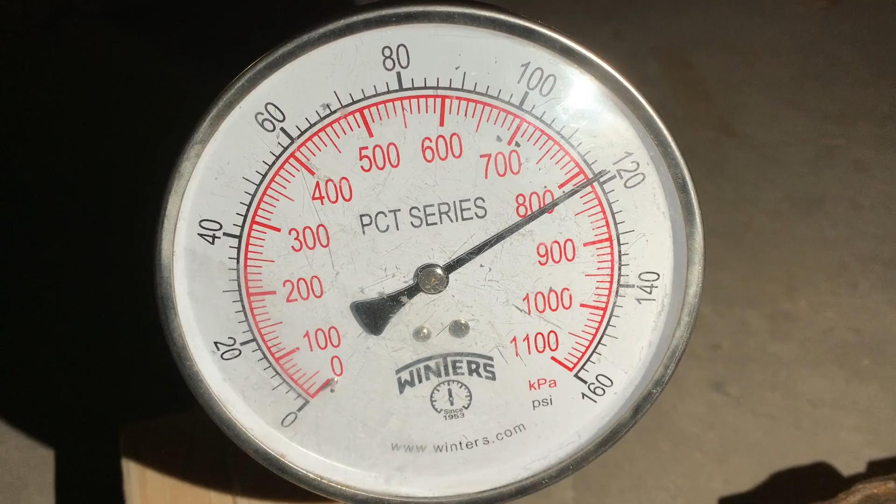We did our pressure test, and there's no light down here, but we did our pressure test, and it's dropped around 2 psi in 2 days. And I think why that happened is because it's starting to get cold out. So the temperature difference makes the pressure go down a bit.

But I'm gonna still go around, check for any leaks, and make sure that there aren't any. Set the pressure back up to 120, leave it for another few days, and go back to it and check. We need to get insulation in this house because cold weather's coming. It's already cold. I'm wearing a jacket already.

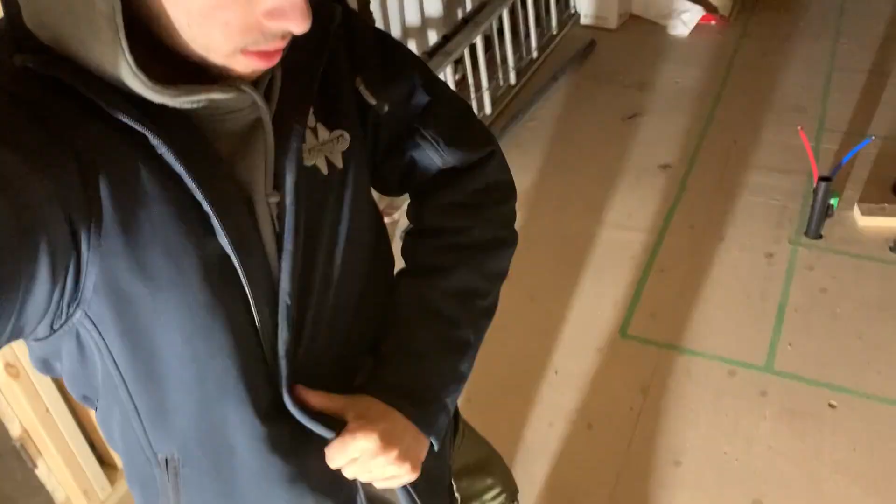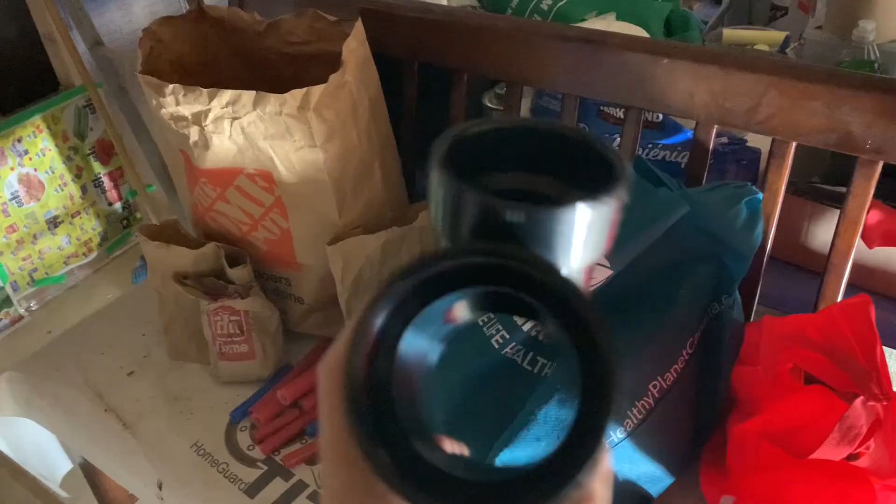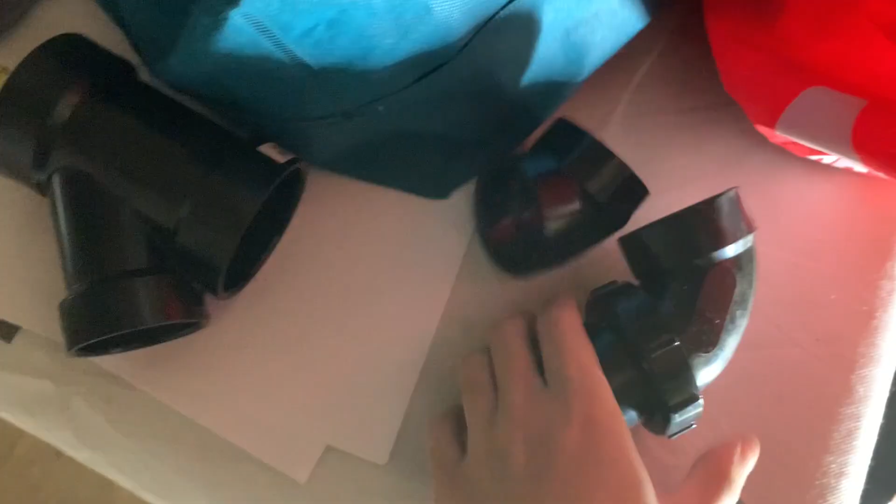So let's get started. So what I'm gonna do up there is I'm just gonna add a 2-inch to 1.5-inch Y that's gonna go this way. So the water slopes down into the drain, which is over there. So it's gonna slope down like this. Then I'm gonna put a 45 like this, put a straight piece, and then put my trap. So it shouldn't be too hard of a task to do.

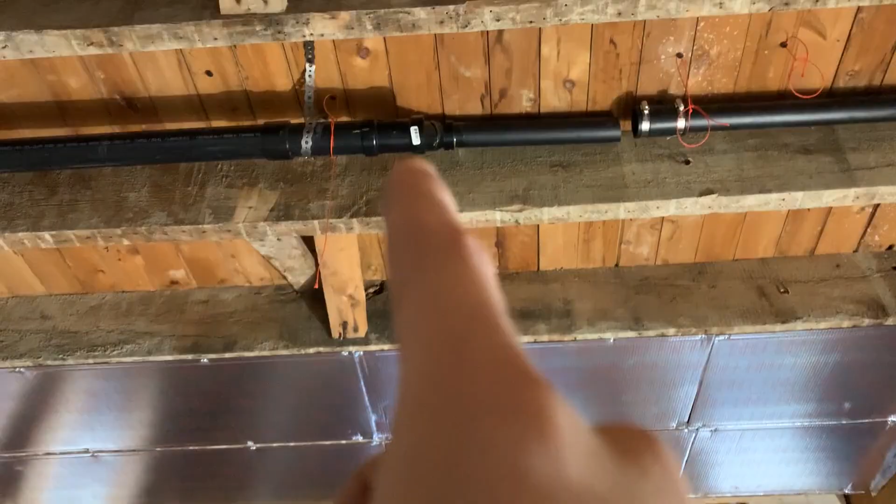Okay, so I got this done. The trap comes down, goes into my 2-inch drain. I'm gonna put a stub out that goes into the hole and into the ensuite. So now that I did that, I'm gonna work on this shower drain. I'm gonna pop it up through there and make my connection for my vent. And then that should be done for all the drains in this house. Then I'm gonna go around, finalize anything for PEX, and the inspection should be ready to go.

Okay, so little situation happened. I had asked a relative of mine if he's able to go and purchase the bathtub that I need to install upstairs. So I sent him a picture of what I needed, and he went to the store, he bought it, he came here, and we were about to bring it upstairs, and then he goes, "You needed a right side drain, right?" I said, "No." He said, "The picture you sent me says right hand side drain." I said, "Oh my God."

So it's the wrong one, and I'm not gonna install the right one today because they don't have the right one in stock. So it was my fault in the first place, but even if I was right, they still wouldn't have had it. So it's nobody's fault. I'm just saying that to make myself feel better. Anyway, so I'm not installing any of that today.

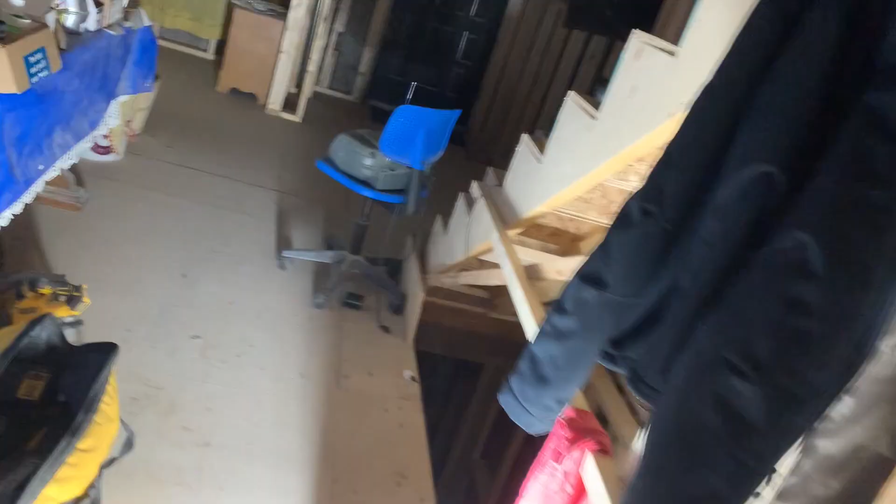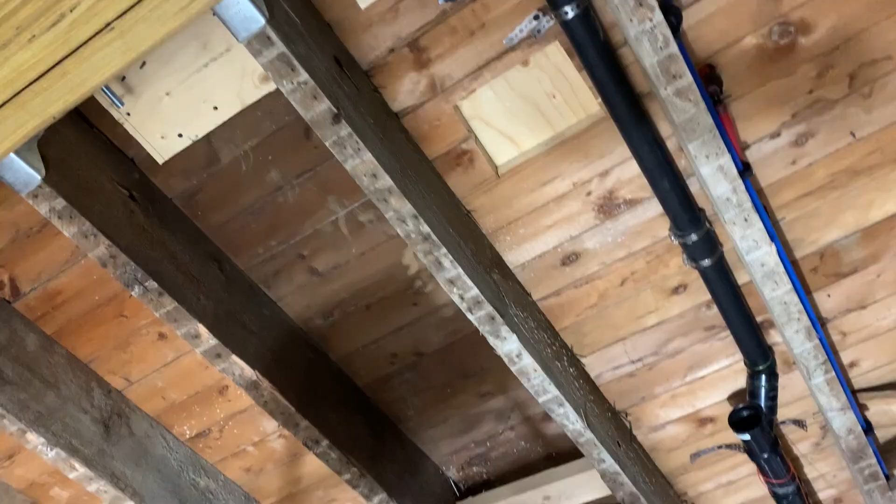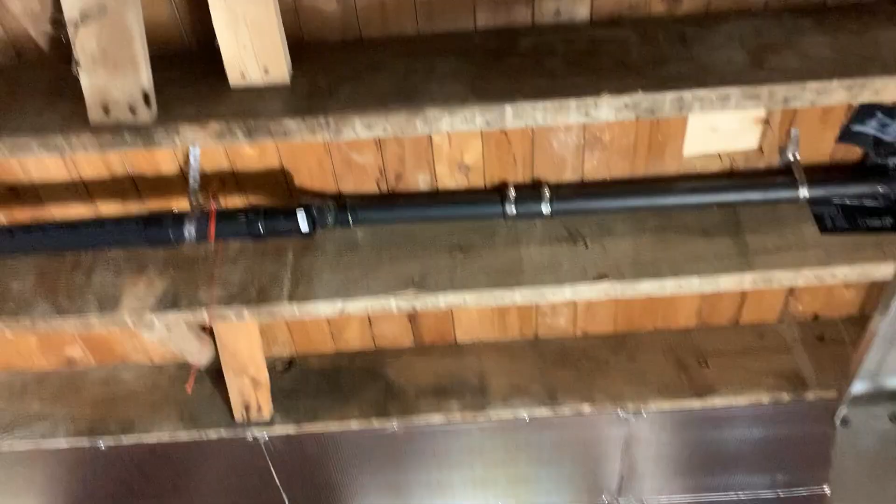But the situation is that I have my overflow drain here, and it has to go up there where I cut out that rectangle, right? Recording is kind of difficult. The problem is that this vent is in the way back here. This one that runs here is in the way of my overflow side. I think what I need to do is buy this bathtub, have it here, and kind of see how much room I have to play with underneath the bathtub on the back side of the bathtub.

So I think today's done. I got this floor drain in. I did my connection to my hose outside. I didn't record that. And tested all my pipes if they're leaking on my PEX lines. And this is the only thing that's stopping us right now from doing our inspection.

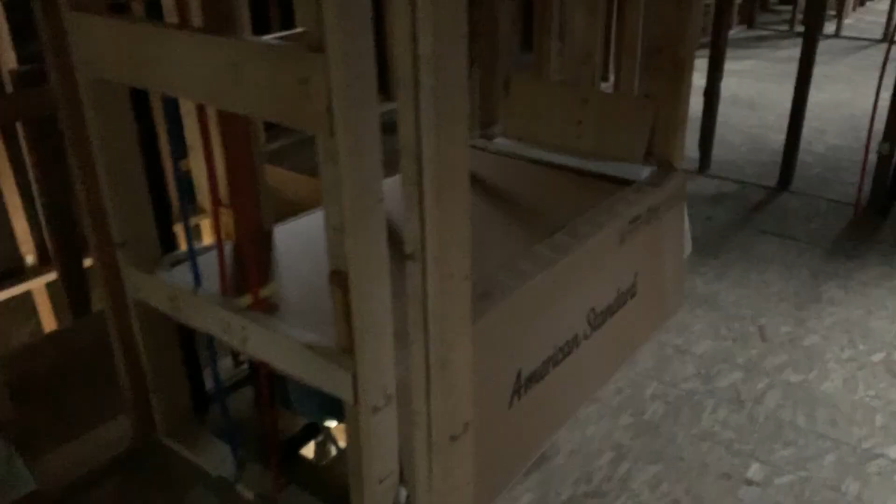Okay, it's another day here on the site. Today, I made a little list of what I'm gonna do. Actually, first I'm gonna show you what we got done on the weekend. I don't really record on the weekends just because I have my dad and my brother helping me out here. So we just kind of try and get things done. But the bathtub is installed in the ensuite. It's all covered up now because we don't want it to get dirty and scuffed up.

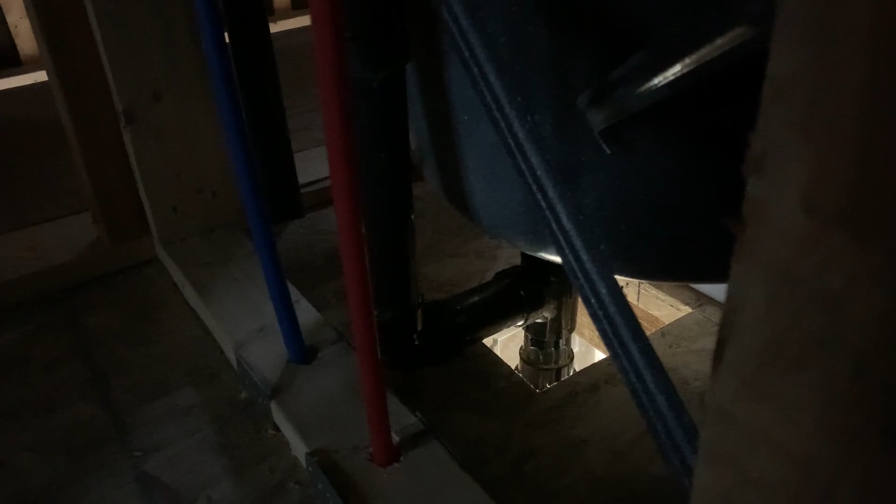But I did my connection down here. We used a direct drain for this shower because I have my vent that's running here. So we needed to kind of deviate somehow. So we used a direct drain, I think it's called. The floor drain of the tub goes directly into the trap and then tees off and goes into the overflow. So that's done. So you can't really see that.

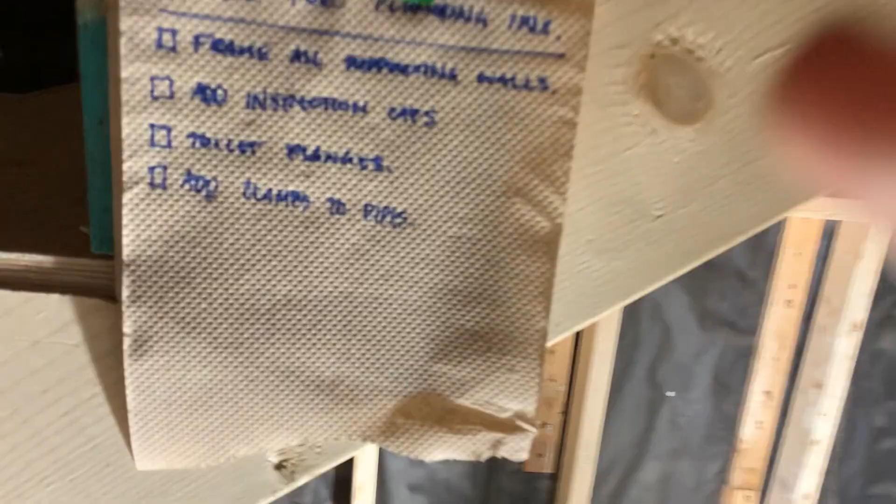Okay. It says frame all supporting walls, meaning everywhere where there's water lines in the basement, because up here everything's fine. Everywhere in the basement where there's water lines that there's no wall to clamp the water lines to, I'm gonna add a piece of wall where it needs to go.

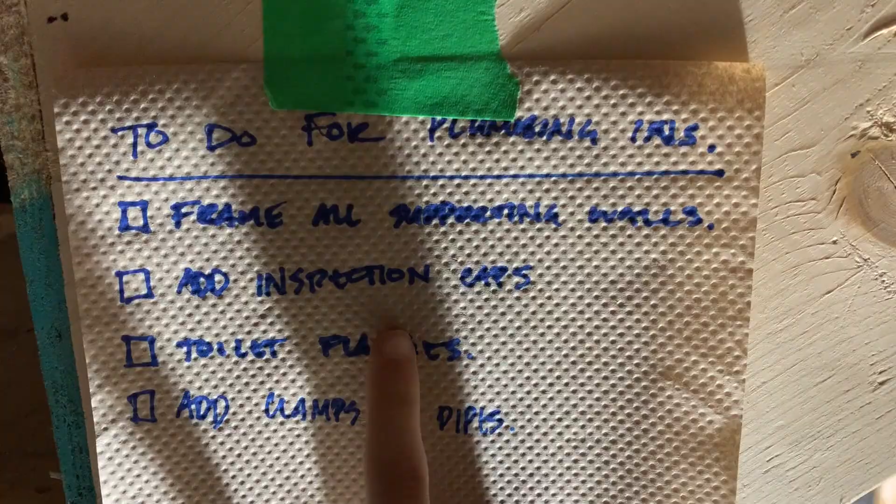Basically, I'll show you downstairs. Add inspection caps. So here in Ontario, you need to fill up your plumbing, your drain lines, with water. So then when the inspector comes, he can kind of knock on the pipes and see if there's water in there. And then you could check if there's leaks.

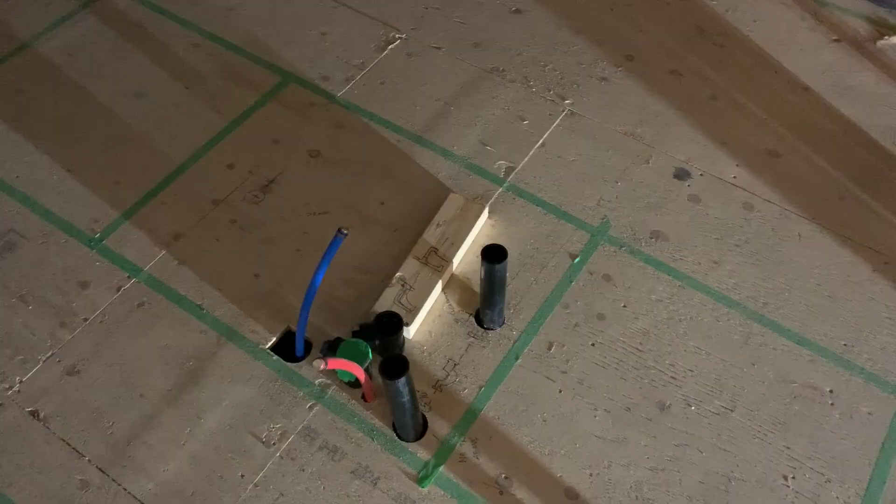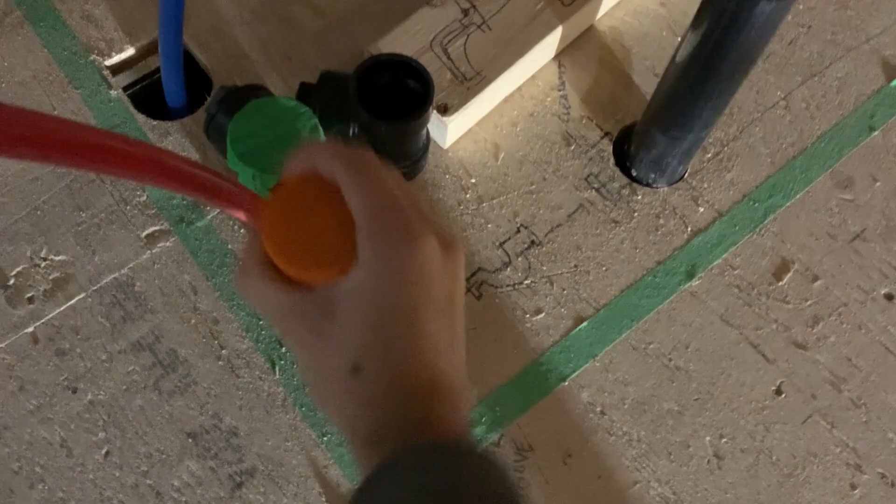So everywhere where you have a stub out, I don't know why it's not focusing. There we go. Everywhere you have a stub out, you're going to put one of these orange caps. And they just go on top, glue them in. And then after your test is done, you could just cut your pipe underneath.

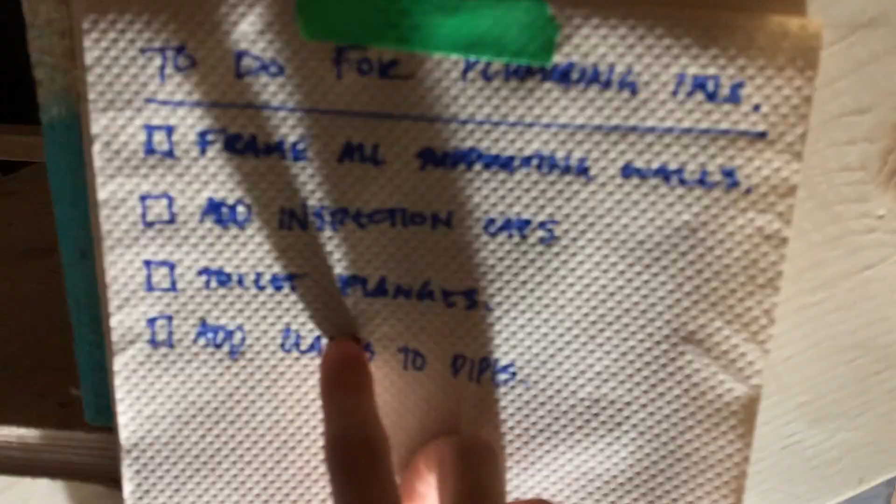Toilet flanges. This is a bit of a problem. So up here, where my toilet flange goes into my floor, it should have been stubbing out far past my subfloor, like these are. But that's not the case. I cut them lower than the subfloor, which is not good, and they're glued already. So I have to figure out what I'm gonna do with those. I'm gonna see my options.

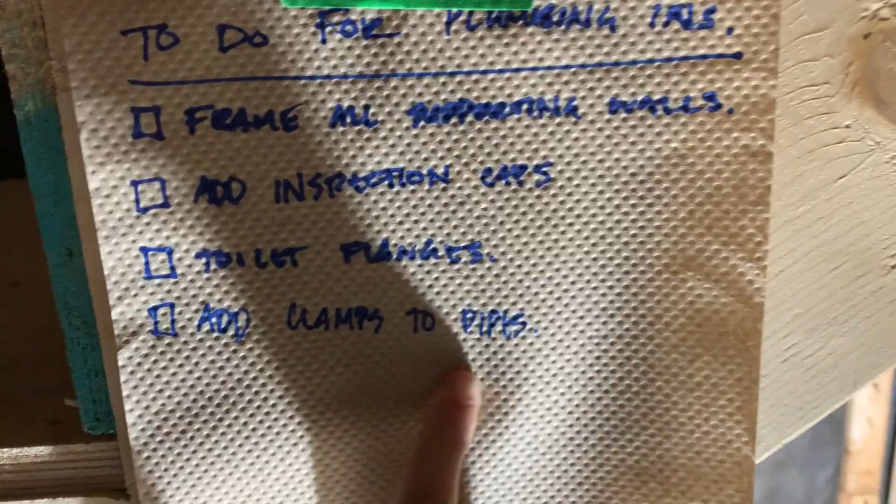And then the last thing is to just add clamps and supports to my drains and my water lines, just anywhere that they need to be added. And then we should be ready for the inspection.

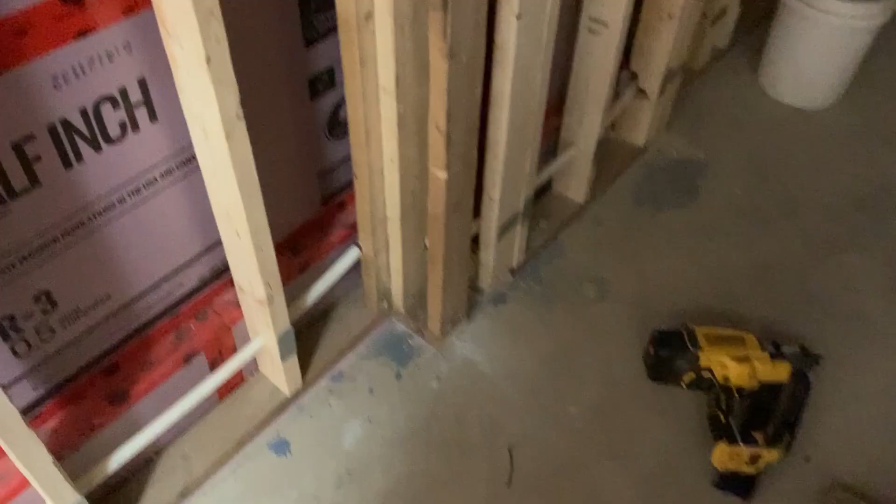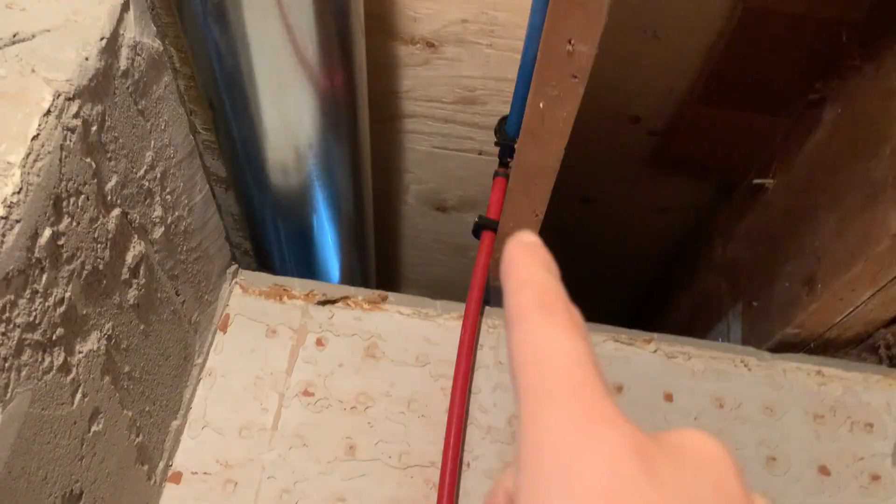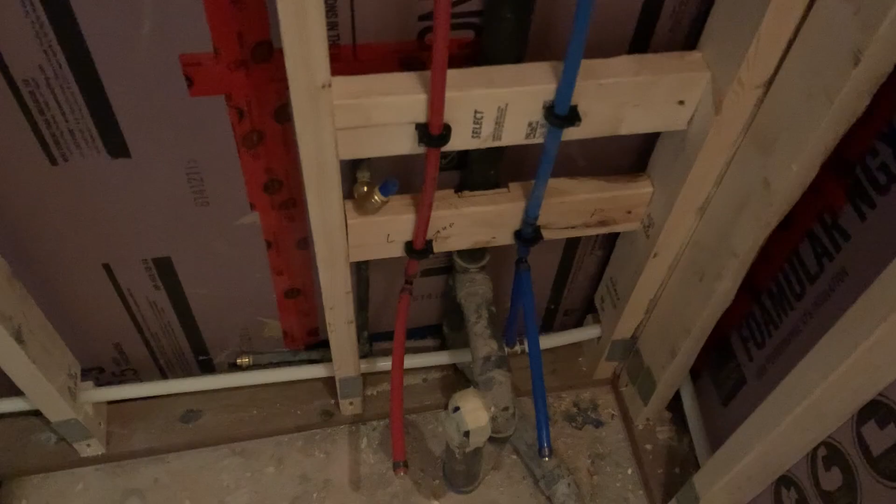Okay, so I got this framed up. It didn't take too long. And now what I'm gonna work on is in this washroom. I know it's a red pipe, but we ran out of blue. But we had to run our toilet line from the ceiling. I initially had it tying in there and then coming down because there was an existing pipe,

and then it came up through there. The problem was we did our pressure test and I heard air coming out of somewhere, and the people who built this house first had put this copper pipe right flush with the top of the slab, which is possibly the stupidest thing you can do. Anyway, there's a huge hole in it, so instead of breaking up all the concrete and replacing the soldering, all that,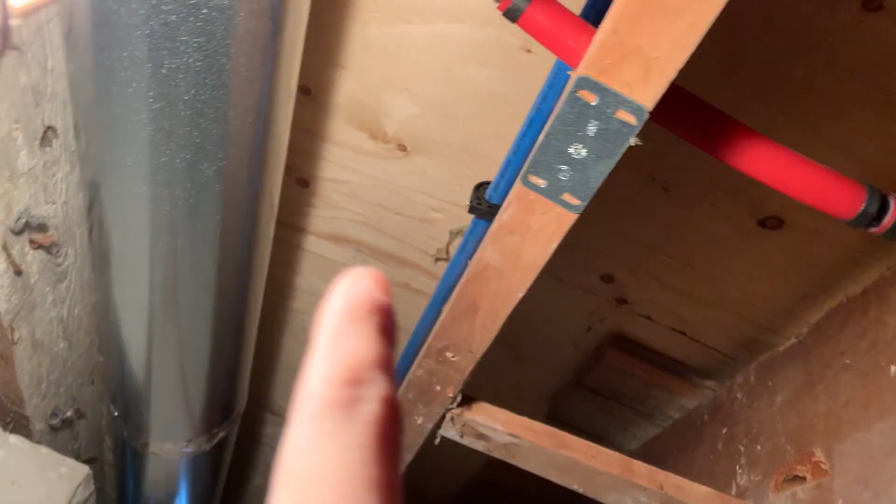we tied it in to my cold water from the sink here. Came up here, the blue line all the way, and then down to my toilet here. So it wasn't too bad, but now I just gotta frame this up, which also shouldn't take too long.

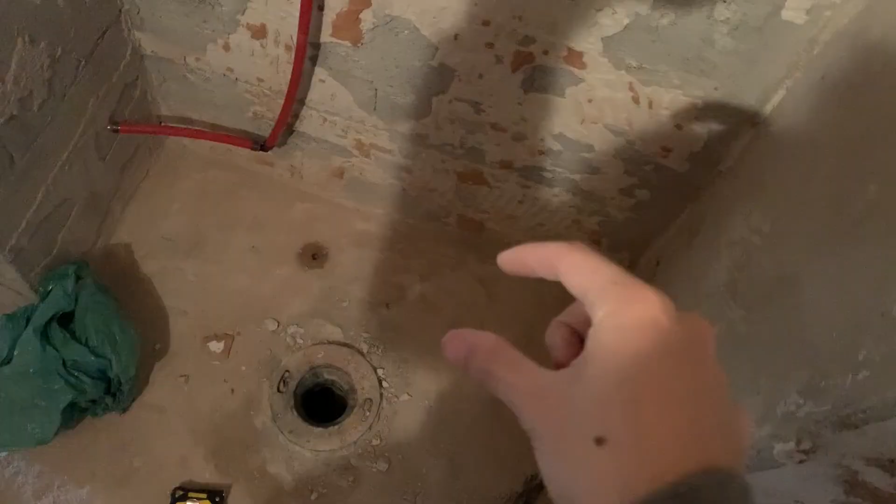Okay, so what I have to do here is, instead of putting my plate down on face like this, I need to put it like this. And that's because if I put it down like this and I take the measurement from that to the center of my flange, it's 11. And it should be 12.5 to center.

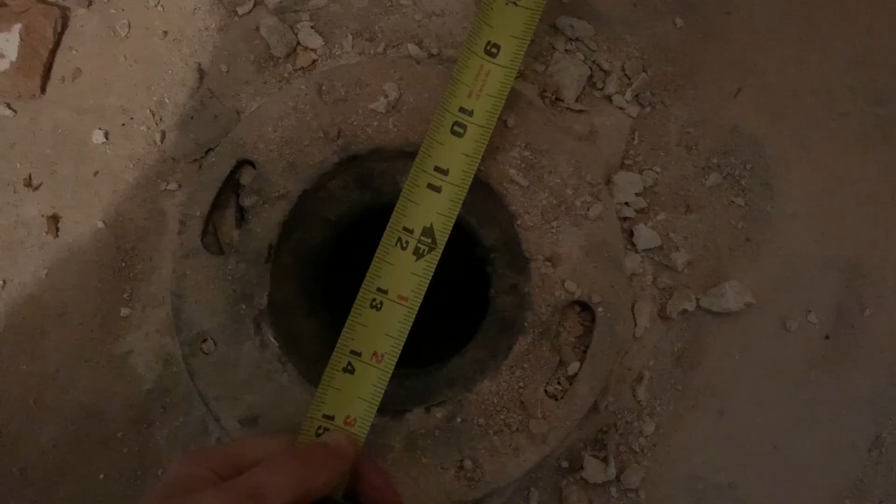So if I flip this up like this and then take my measurement, we're at 12.5. So I'm just gonna install it like this, put Tapcons to the face, and call it a day.

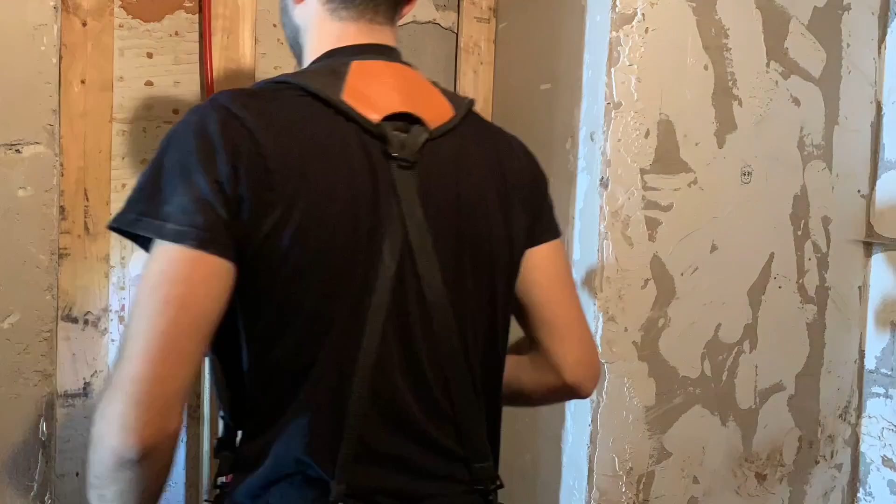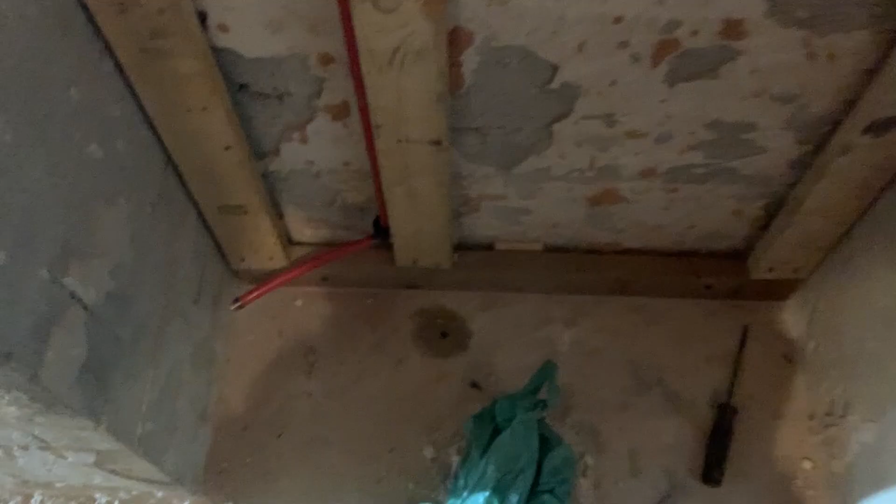Okay, this wall is done, framed up. Doesn't look the greatest, but does the trick. Keeps this nice and straight. Obviously facing in the wrong direction, but I'm gonna add a thing underneath. It's basically a clip that holds it up. That's like when we install a toilet. But that's it for this. I'm out of 2x4s, so I can't finish the back walls.

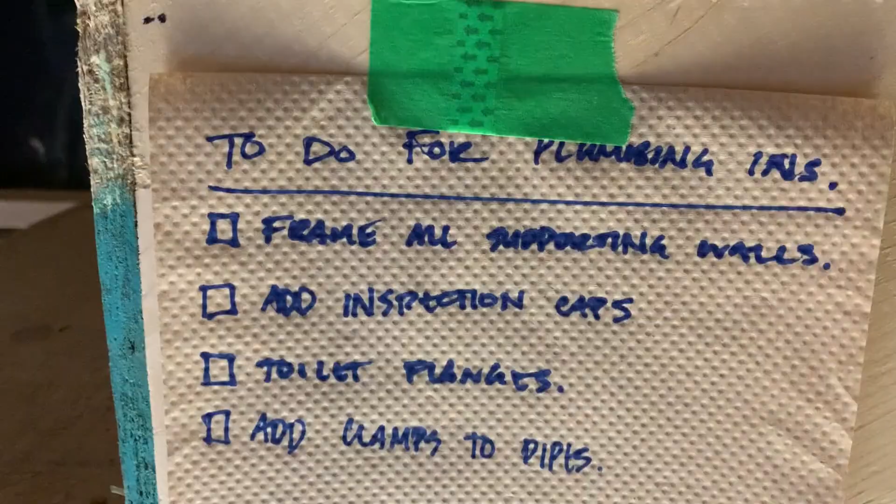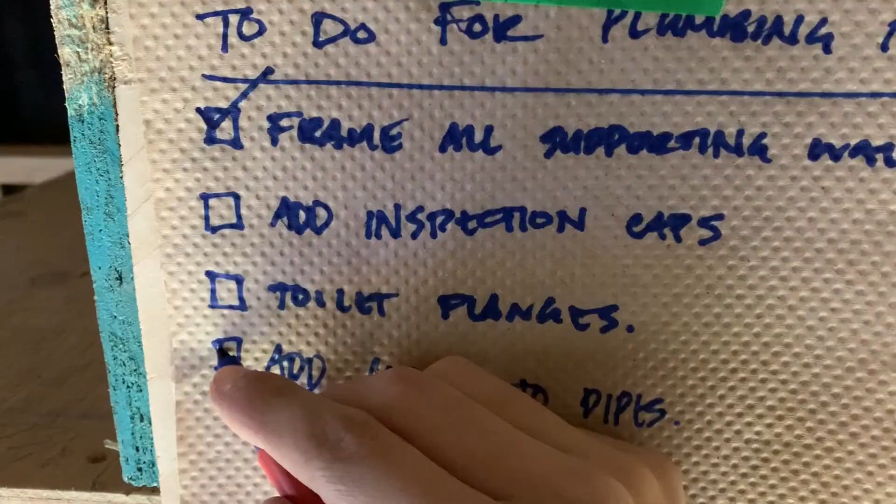So let's go take a look at the checklist and see what I checked off. I think I only checked off one thing, but let's go see. Okay, so if we look at the checklist, we can check off framing, add clamps. Now we have to do the flanges and adding the caps, which the caps shouldn't take too long. The flanges is probably going to take the longest. I'm going to do these kitchen ones first and make my way from there.

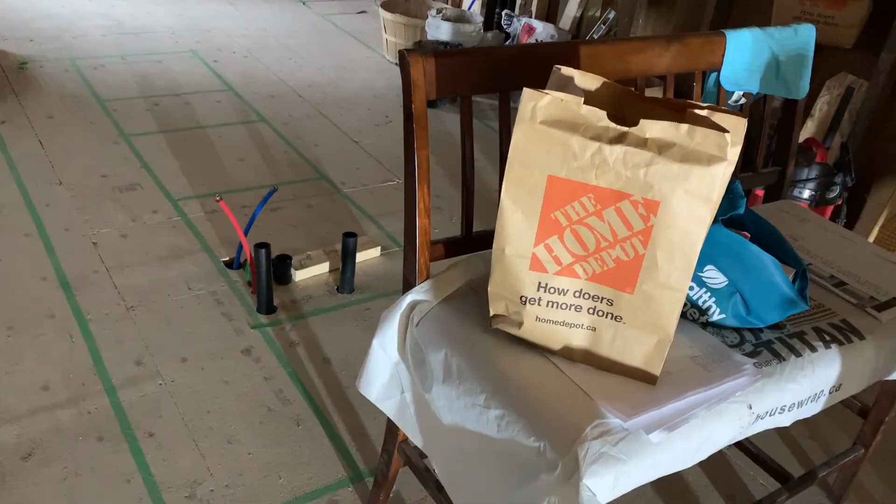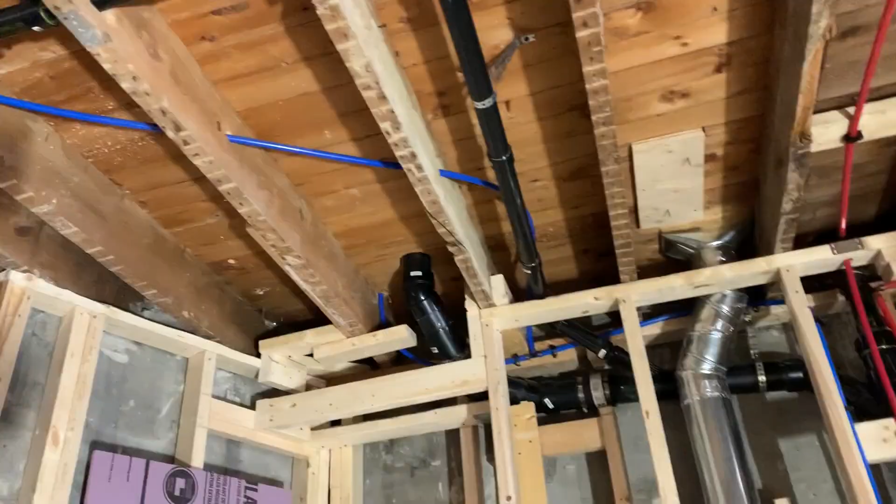Okay, so I just ran to my hardware store and I picked up a few things. I'm gonna show you kind of what my plan is for these toilets. Get the receipt. Okay. What I'm gonna do, couple. I'm gonna put a couple right at the end there. I'm gonna cut it a bit lower so this fits.

Then what I'm gonna do is I'm gonna take some 3-inch pipe, run it long above my subfloor. Then after the tiles are installed, I'm gonna put my flange in. I think that's the easiest way. And then, I don't know if it's called a couple or coupling.

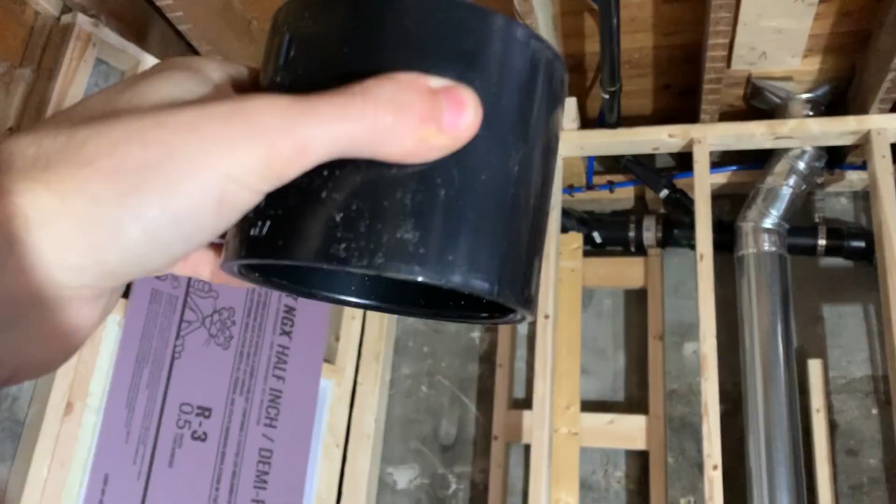Anyway, if my coupling takes up too much space, meaning that it goes too high up to where I can't put my flange on my pipe because it's gonna hit the coupling first, I'm gonna buy the flanges that you put inside the pipe instead of the outside, which I think is better because there's probably less of a chance of a leak if you put it on the inside. I don't know, that's just my thinking. But I'm gonna cut that shorter.

Add my coupling with a longer piece of 3-inch and then cap it off so it's good for my inspection. Okay, so I just finished this. I put my coupling on as close as it could go to my 45. And then upstairs, I'll show you what I did upstairs. I basically just put, like I said before, just a piece of 3-inch pipe going up.

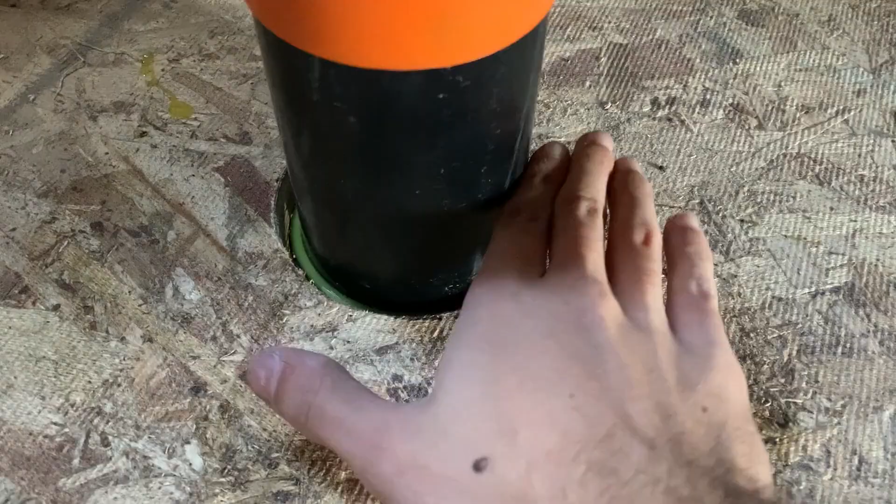Anyways, I just put a 3-inch pipe going up, and that's what it looks like. So I'm gonna run my tiles against this, and once my tiles are installed, I'm just gonna take my buzzsaw, cut flush to the top, install my flange that goes in the 3-inch pipe instead of around. And that's it for that.

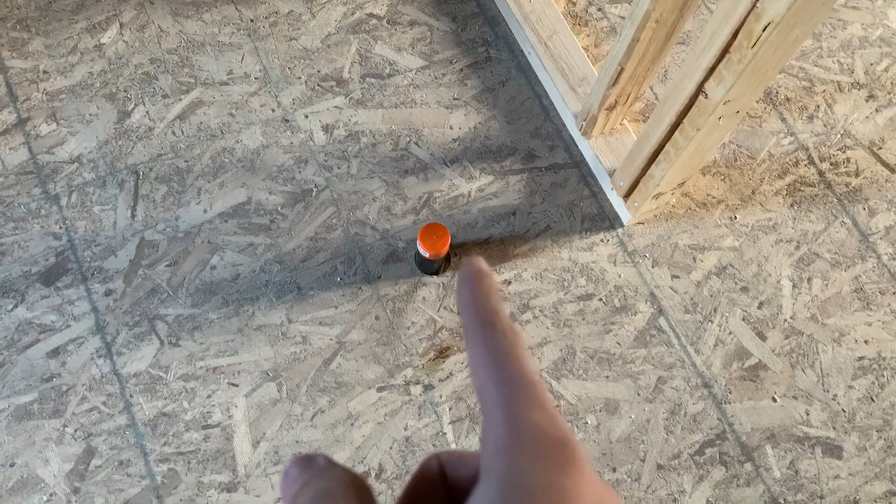I put a cap on my floor drain for my laundry room. Laundry room is just where the laundry machine is gonna go. And I think that's it for up here. Of course, they have to run out of those 3-inch test caps at the hardware store. So I can't plug the one in the powder room today. And my inspection is either tomorrow or Wednesday.

So I might have to go by tonight to another hardware store and see if they have it and install it tomorrow morning. But I'm gonna do the same thing that I did for the ensuite. I'm gonna do it over here. I'm gonna go downstairs, cut my pipe a bit lower. It's really dark. I'm basically gonna do the same thing down here as I did upstairs.

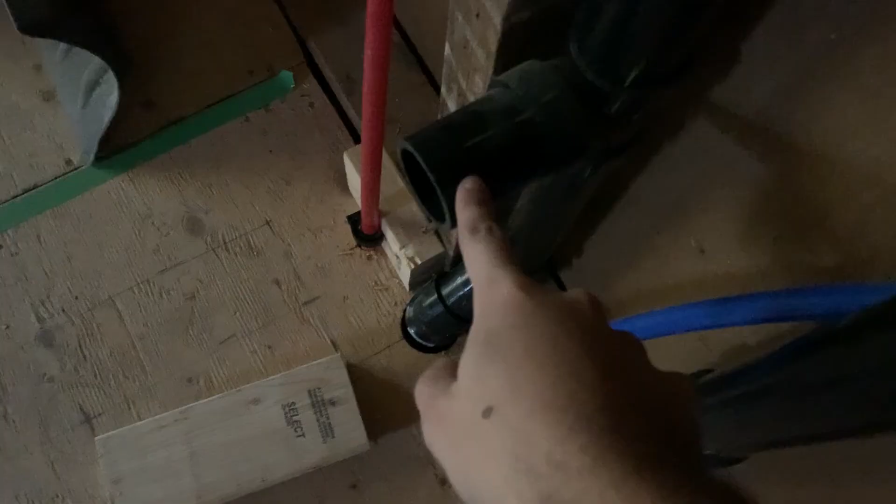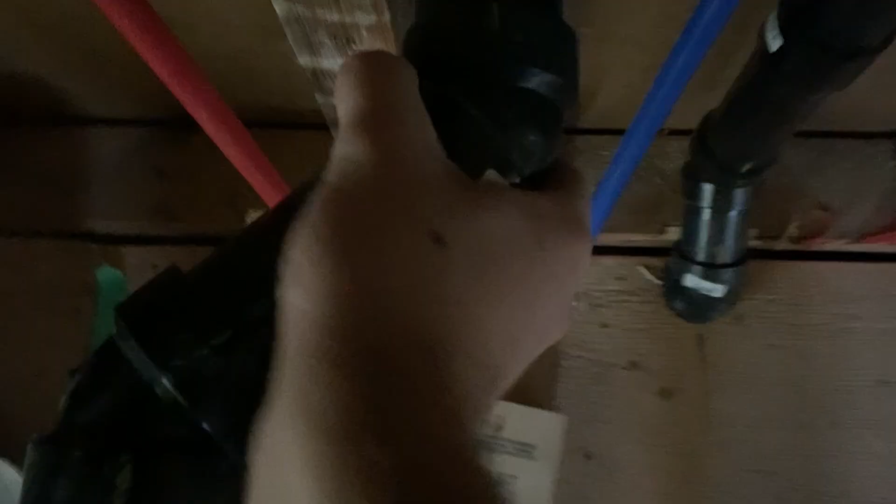And then over here, it's already glued because I had my measuring, like I glued all of this contraption to go here for our bar. And I had to do this all because there was a stud here. But what I'm gonna do is I'm gonna take a rubber coupling and then just put a 1.5-inch pipe out of that, put a cap on it. And then that should hold. I don't know if that's gonna be accepted during the inspection, but if it's not, it is what it is.

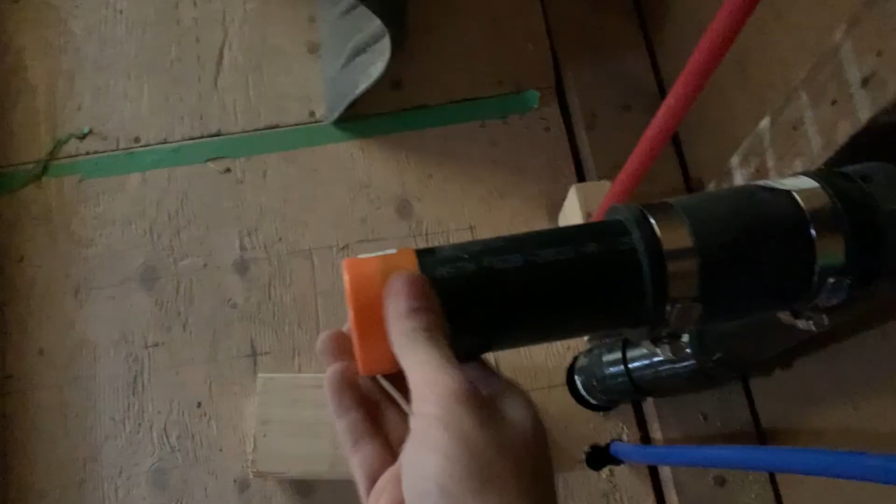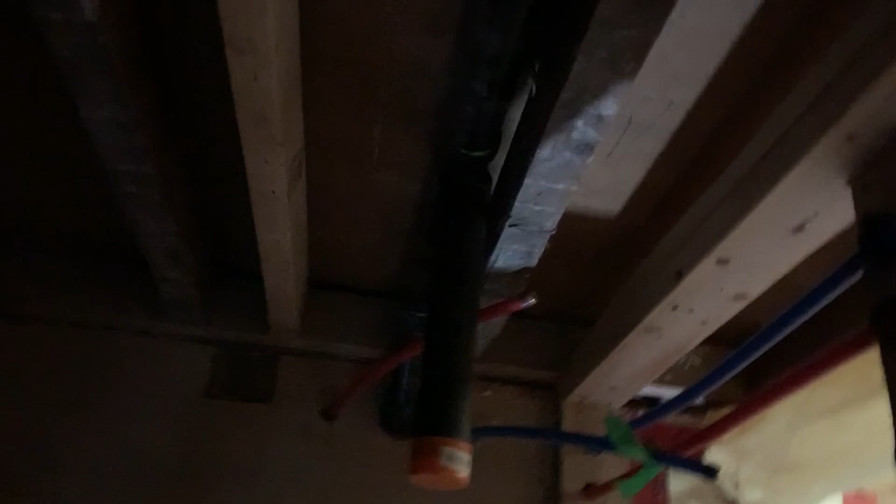So actually I'm gonna do this one here first, the bar, and then I'm gonna do the powder room. Okay, so I just added my plug here for the bar. So I just put a rubber coupling on with a pipe, glued this on. So then this pipe that I have in here stays the same size. Then over here in the powder room, I did the same thing except without a coupling. I just glued my pipe longer than it obviously should be with a cap.

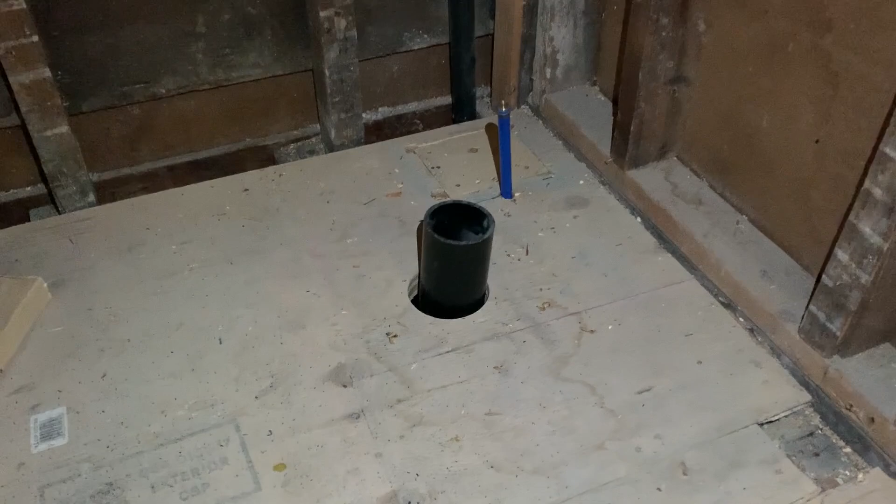I did the same thing as I did for my toilet upstairs. I glued a coupling, and then I just glued a 3-inch pipe going up. So I think we're all done and ready for the inspection. No, we're not. What I have to do is plug 2 more sinks.

Okay, so you learn something new every day, because these orange test caps are apparently not supposed to be glued. Not that they're not supposed to be, but they're meant to be temporary, so you don't need to glue them. The reason why you don't want to glue them is if you're in a tight spot, then you can't get it out. But I'm just going to be cutting these. But yeah, you're not supposed to glue them.

So for the last 2 that I have to do, I'm not going to glue them, because they're friction fit, so you just push them in. That made sense. When I was gluing them, I was like, why is it so hard to get in? But they're friction fit, so you don't need to glue them. Anyway, let me go work on those 2 downstairs.

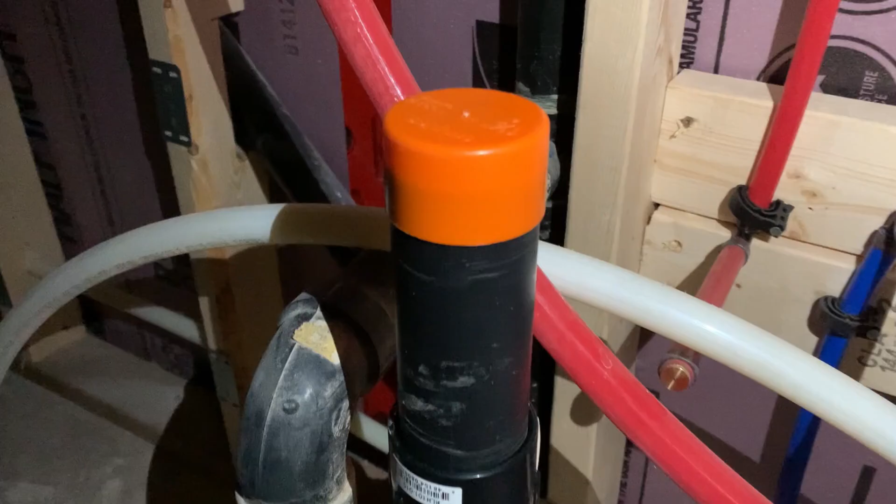Okay, so I added the 2 down here. Right here, I just screwed it on, put a piece with a cap, and I did the same thing over here. Twist on, not glue the cap. So that pretty much, I think, wraps everything up for what I need for my plumbing inspection.

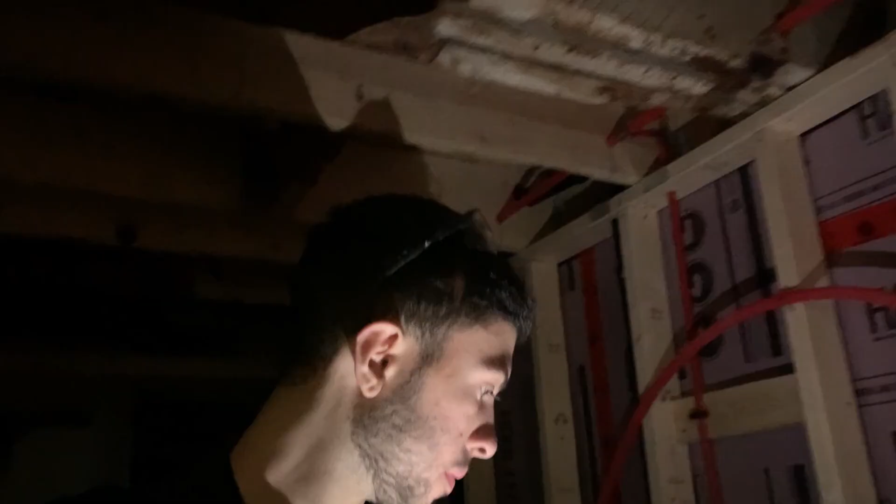I'm gonna go around, see if I need any more nailing plates. I already see one I have to add. And see if there's anything else left to do. But I think I should be ready for the inspection. So, I think that's it for this video.